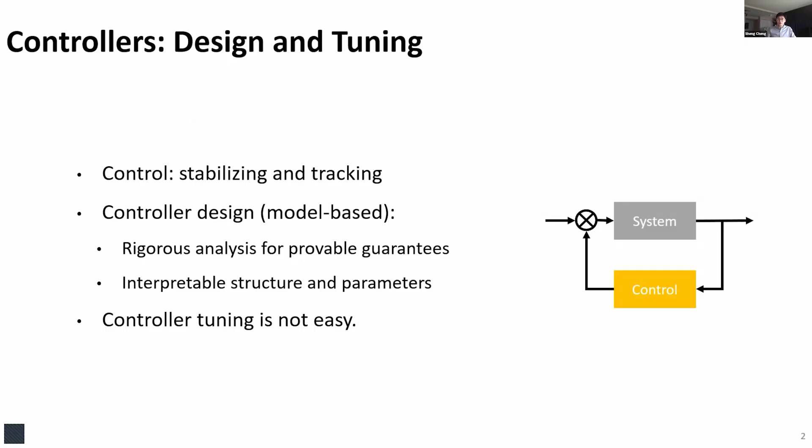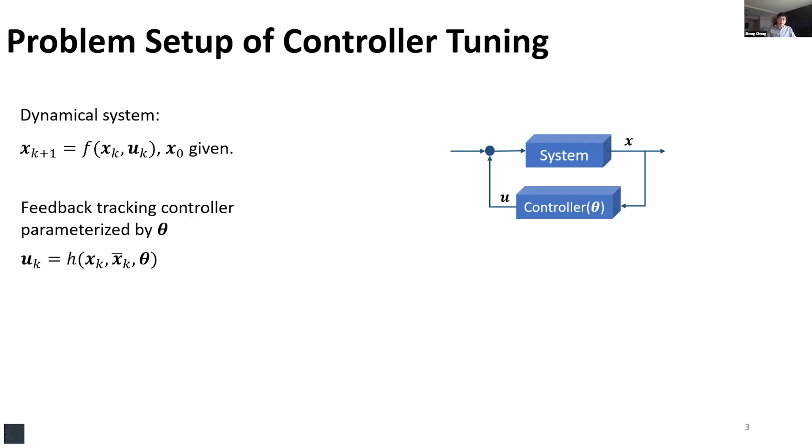So why is that? Well, to answer the question, let's first take a look at the problem setting for controller tuning. First of all, you would have some target system, and you can have a dynamical description using the dynamics. And then you would have a target controller that can fulfill the control functionality of your system. Here we use tracking control as an example. The goal here is to track this x_k bar as the reference using the feedback state x_k, and the controller is parameterized by the parameter theta.

And the goal for controller tuning is to change parameter theta so that you can meet the performance metric of your system, denoted by the loss function L. You can think about tracking error as an example of what you want to reduce. So what happens when you do this controller tuning by hand? First step, you're gonna collect the state and control actions, and then you can evaluate the loss function. You got this number, and then you say, okay, I'm going to change one parameter value and send it back to the system for another round of evaluation.

So the key limitation here when you do this by hand is that you can only change one parameter at a time. And this is the major practice because if someone changes more than one parameter each time, say two, then it's hard to tell which parameter change leads to the performance change, and it's going to make the decision of the following parameter change harder. But changing one parameter each time really cannot scale with the dimensionality of your parameter space, and it's generally hard if the parameter space is bigger than 10.

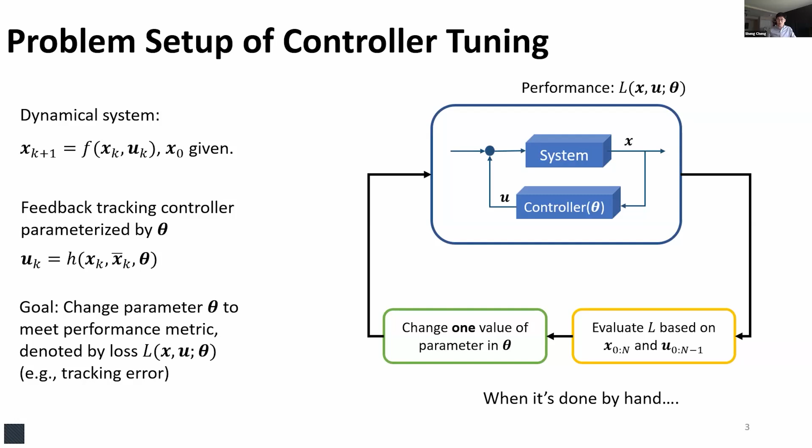So to solve this problem, people have come up with solutions called auto-tuning. There are two main categories of auto-tuning so far. One is following the model-based approach, where the benefits are that you can leverage the prior knowledge of your system and also ensure the stability by design. But the caveat is that the model-based approach is mainly based on simulation, which means that when you collect data from your real hardware, you cannot directly put it back to your simulation to get a new parameter.

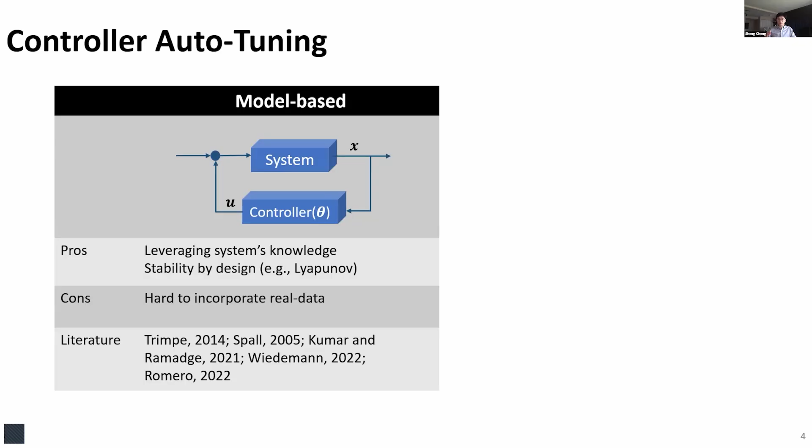And rather, we always have to follow this simulation-to-reality type of practice, and there can be sim-to-real gaps. And then in recent years, there's the rise of machine learning-based approaches, which constitute model-free auto-tuning. Normally they use data-driven methods using machine learning models or tools like Gaussian process regression. And in general, in the model-free approach, there's almost no assumption on the system or the controller.

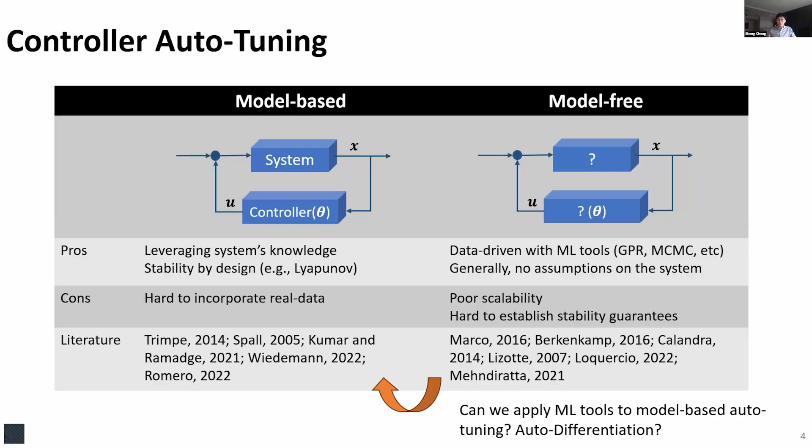But the problem when you put aside your system's prior knowledge is that the approach can scale poorly with the dimensionality of your parameter space. And also, because of the loss of prior information, it's hard to know when the parameters you obtain from the machine learning models can give you stability. So we asked the question, can we apply machine learning tools to model-based auto-tuning for, say, better efficiency? And the answer is yes. So we came up with this auto-differentiation enabled auto-tuning method called DiffTune.

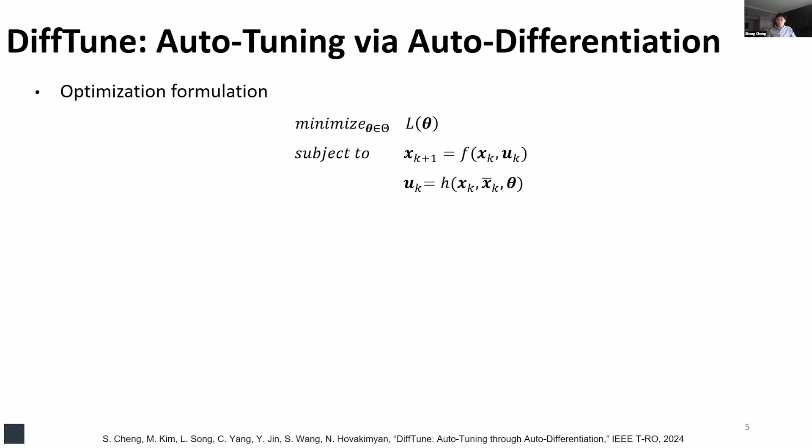So the first step is to formulate the tuning problem as an optimization problem. The goal here is to look for a parameter theta so that you can minimize the loss function subject to your chosen system dynamics and your chosen controller. And all we require here is that the dynamics and the controller are differentiable. If you look at the literature, many controllers have been shown to be differentiable in recent years, like PID or optimization-based control laws like MPC, optimal control, or even CBF. And again, our solution is called DiffTune, which is a gradient-based method. It has the nice features of stability, efficiency, and also compatibility with real data.

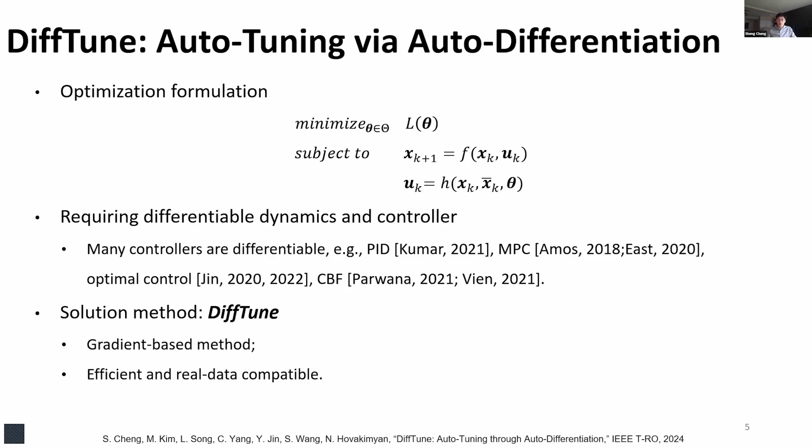So how does it work? We start with the system, we collect the data, and then we can evaluate the loss function based on this single trial. Then we proceed to compute the gradient of the loss function with respect to parameter theta. And with this information, we can apply gradient descent. Here we have a projected gradient descent to make sure that the new parameters we obtain each time are within the feasible set denoted by capital Theta. This feasible set ensures stability of your system and can either come from theoretical analysis, such as Lyapunov analysis, or be empirically determined following expert experience. With the updated parameter, you put it back to the system, reevaluate the system, and then repeat the procedure.

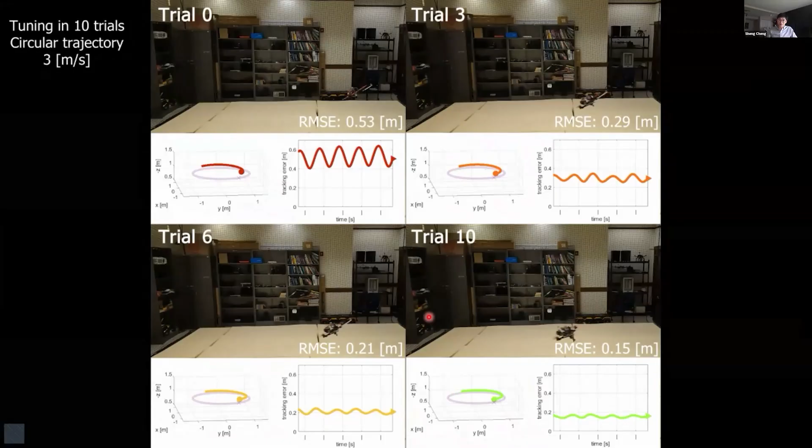So this video shows the 10 trials that we performed over the quadrotor. What you can see is from the beginning, the quadrotor can barely track this circular trajectory. And through iterations, the tracking condition is getting better, and towards the end, it can smoothly track this trajectory.

And moving on, we also extend the usage of DiffTune to model predictive control, which is a popular controller choice due to its inherent handling of dynamics and modeling and the constraints. But tuning for MPC is also hard, and the reason is that the nonlinearity now comes in an embedded way from the iterative optimization algorithms.

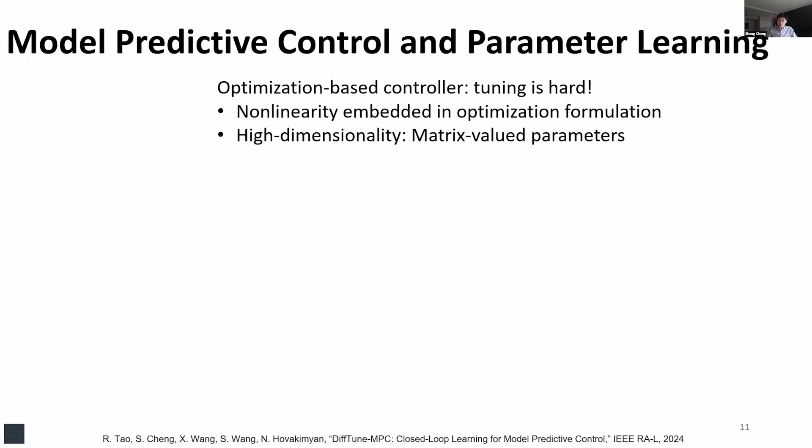And then the high dimensionality of the parameters comes from the fact that when we tune for the cost matrices, you can think about the quadratic cost like LQR. The Q and R matrices are the parameters you tune, and their dimension actually is the square of the dimension of the state and the control action, which can be quite tricky.

So people have also studied the problem of auto-tuning of MPC, and in general, it's called parameter learning. And then there are also two categories. The first one is the open loop learning, where the goal is to improve the open loop optimal solution based on certain performance metric. And this can be done efficiently using differentiable programming. But the problem is that open loop setting has a significant drawback for a short horizon. So this limits the application of open loop learning for MPC to mainly imitation learning.

And then on the other hand, there's also the closed loop learning problem, which is actually the auto-tuning for MPCs. And the goal here is to improve the performance of a closed loop system that uses MPC as a controller. So existing approaches mainly explored probabilistic approaches that iteratively update a probabilistic model to guide the distribution of sampling. And the issue is that because it ignores the model information or the MPC structure, it can be rather inefficient.

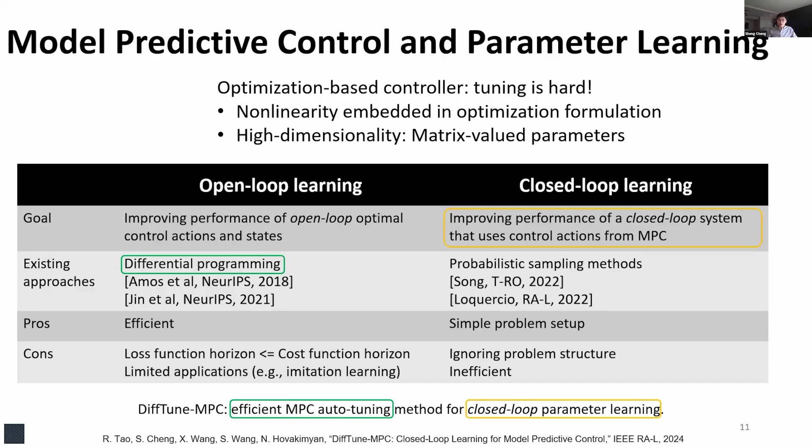So we apply DiffTune architecture to MPC and utilize the efficiency of the differentiable programming and make the tuning problem serve for the purpose of closed loop learning. And the key here is to differentiate the MPC problem, which is an implicit differentiation. So here I use the simple example of a linear MPC for illustration.

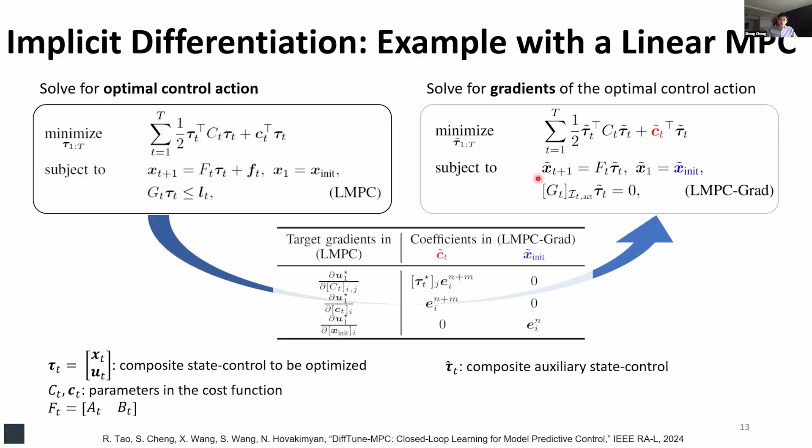So this table shows this procedure of how you can obtain the target gradient that's used for the sensitivity propagation by plugging in these values into these parameters to the auxiliary problem, solve it, and then the returning solution will be these gradients of interest.

So we compare our approach with the baseline closed-loop parameter learning with MPC called the PSMPC that applies policy search to find the optimal parameter, and it uses a probabilistic model to capture the distribution of the optimal parameters. We conducted comparisons over several systems on different trajectories, and we observed the efficiency and optimality of DiffTune one more time, thanks to the effective usage of the first-order information.

And we also extend DiffTune MPC to bipedal robots. So in this case, there is a dilemma on the model choice. So you can pick a simplified model that's differentiable, but it has rather low fidelity, and it can cause the model mismatch and suboptimal parameters. And then you can also pick a high fidelity model that mitigates the sim-to-real issue, but the model itself is not differentiable. So unfortunately, we cannot apply DiffTune.

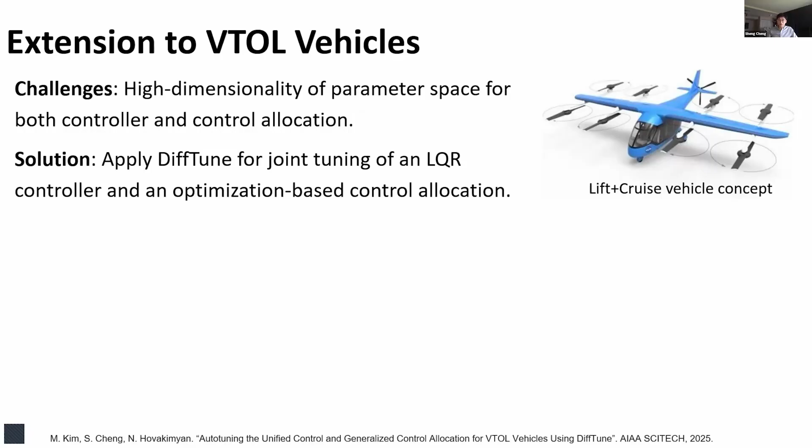Okay, and another example we use DiffTune for is VTOL vehicles. So these vehicles are typically overactuated and they need control allocation. So this actually results in the performance of these vehicles depending not only on the controller, but also on the control allocation. So here we apply DiffTune to this problem to jointly tune an LQR controller and an optimization-based control allocation.

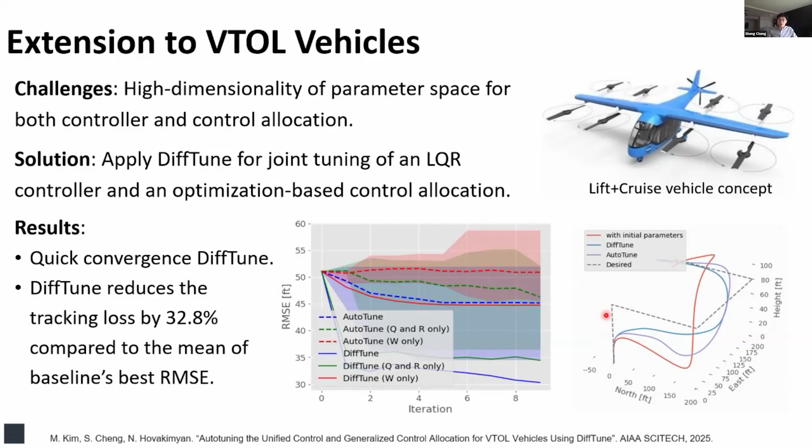So the total dimension of the parameter space is 35, and we achieve a better performance than the baseline approach. And down on the bottom right, you can see the tracking of the lift plus cruise vehicle for this transition flight that constitutes a rotor-borne flight in the beginning for takeoff, and then a cruise flight based on wing-borne flight for the horizontal maneuvers.

So one last thing I would like to mention is our open source toolset. So we open sourced two repositories, one for the explicit controller and one for MPC. So we have coded the sensitivity propagation and also the auto generation of partial derivatives and provide templates and examples for illustration. So you can just bring in your dynamics and the controller, use the tool, and then come home with your best parameter possible for your task. All right, so that's pretty much it.

So for our ongoing and future work, we are expanding to online parameter prediction for unseen tasks. So we noticed that nowadays people are dealing more and more with robots that have the learning capability to handle unforeseen tasks. But down to the low-level control, we normally use the factory design control parameters, which have limited generalizing capability. So our goal here is to enable an online prediction of optimal parameters subject to unseen tasks that can come from the upper level learning modules for unforeseen tasks. And we hope that this can offer from the low level the true capability of generalization of the motion of our robots.

And then we're also modifying our current paradigm to include a model learning step so that we can better handle the model mismatch between our model and our real system. And we also look into the non-differentiable systems as well as the trade-off between performance and robustness.